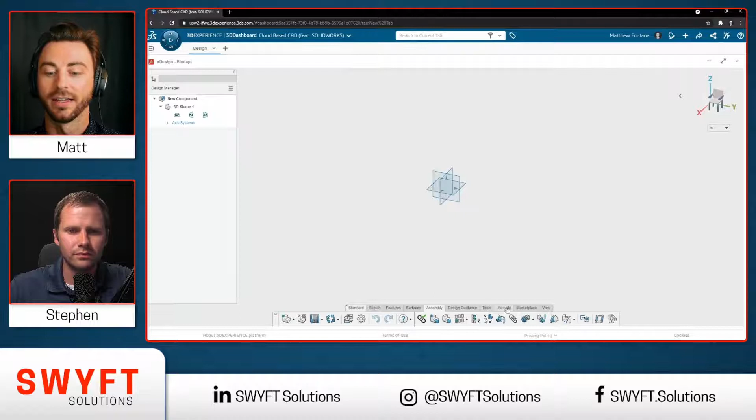So you're able to insert other components. You have all of your standard mates for mating these components together. You even have some evaluation tools like clearance check, and built into all of these is the data management side of things too. So you have your revision tools, your reservation. You're able to collaborate really well with your team.

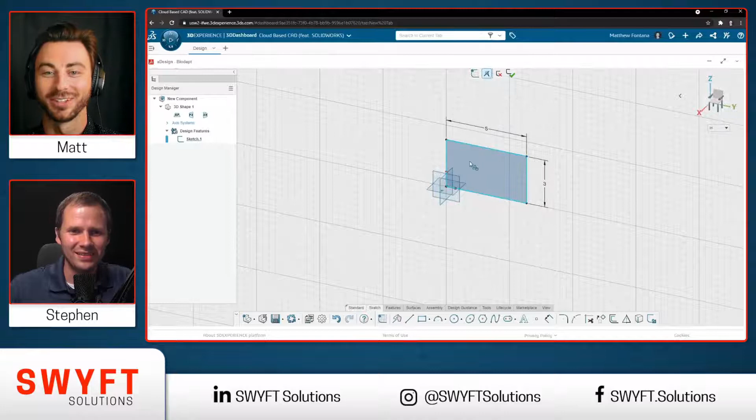Jumping into a workflow, you're able to sketch on a plane just like you would if you were in SolidWorks, and then you're able to, like you always should, fully define your sketch. So make sure you fully define your sketch as you're moving along in your modeling process. No blue lines. Absolutely not, I will not accept it. Then you go ahead and choose your extrudes, your cuts, whatever you want to have as a feature. Just like SolidWorks, you now have that feature in your interface.

Now with the xApps, there is something specific to xDesign. There is something called super features, where you're able to change a feature after the fact.

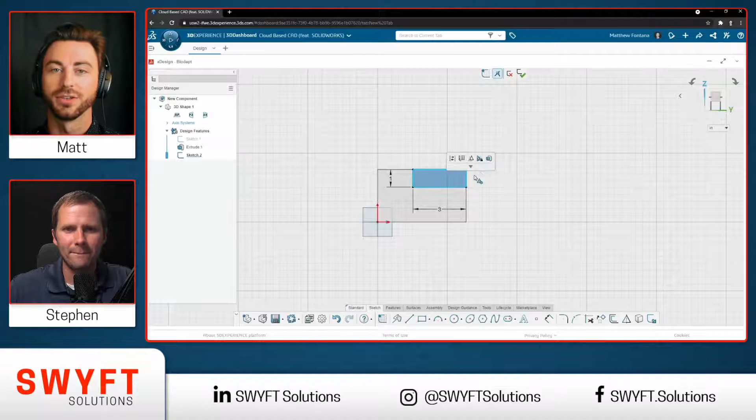If you've ever had a situation where you draw a sketch and say make it an extrude, and accidentally create an extrude when you meant to cut into that, you'd have to delete that feature. In SolidWorks you'd delete the feature and the sketch is still there, but why not just switch it to a cut? Here you're able to have a super feature, and instead of redoing that whole feature, you just revert it back into whatever you meant originally.

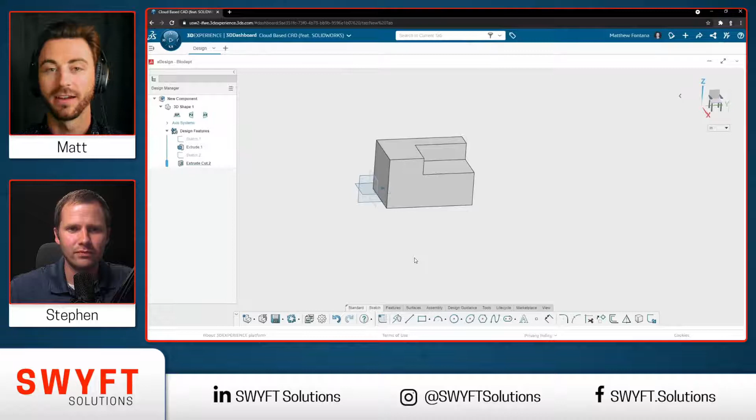So that's just a really quick glimpse at xDesign. For a lot of people with basic 3D modeling capabilities, you're going to be able to carry right over from SolidWorks and jump right into xDesign on whatever device you're on, and just start modeling away and making all your parts and assemblies.

Now, I didn't want to stop you, but you jumped in right away and mentioned saving your data and cloud data management. So just to be clear, I can not only use this app anywhere, but I also have access to my data anywhere.

Absolutely. Your data is cloud stored, secure, and it's not just stored on the cloud - you have your PLM built into that as well. So your revision control, your lifecycle management, you can even do branching off to do some concepting. All of that's built into the power of the 3D Creator role, which houses the xDesign app.

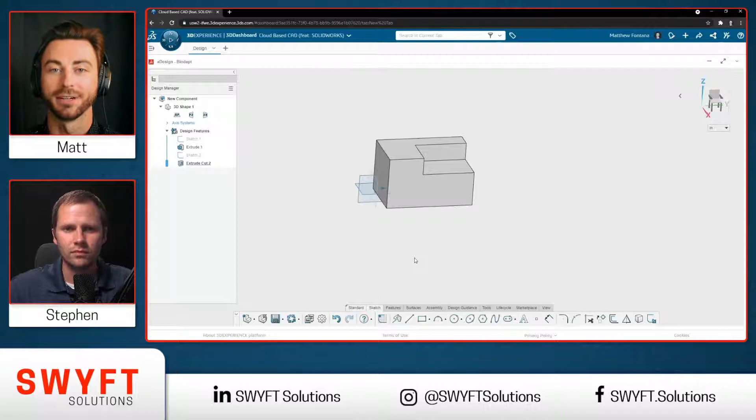Awesome. So let's take a look at xShape. For people involved in SolidWorks, xDesign was probably quite familiar, but xShape will be a whole new concept to SolidWorks users. It's using a subdivision modeling approach, wherein traditionally, to create those aesthetically pleasing industrial design types, you'd have to get really good at surfacing, with a lot of curves and sketches all over the place to make the surfaces just right.

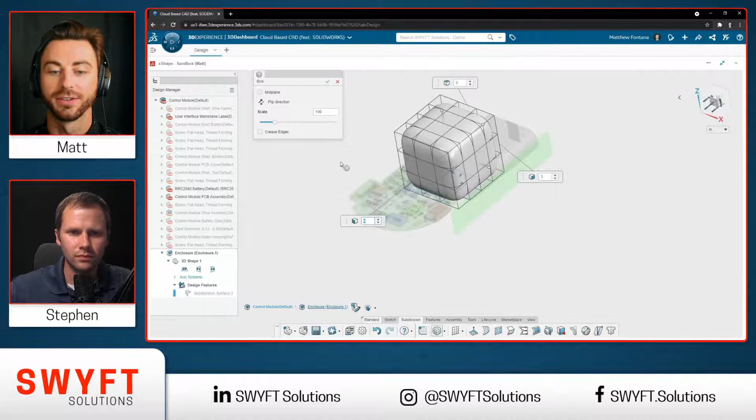So with xShape, say you have an enclosure that you want to build. You can have the geometry there that you're going to build it around, add a virtual hunk of clay, and then choose how refined you want that mesh to be in the 3 dimensions - you can choose if you want it more refined in one direction versus the other. Once you have it all set, you can position it as needed and place it into the geometry itself.

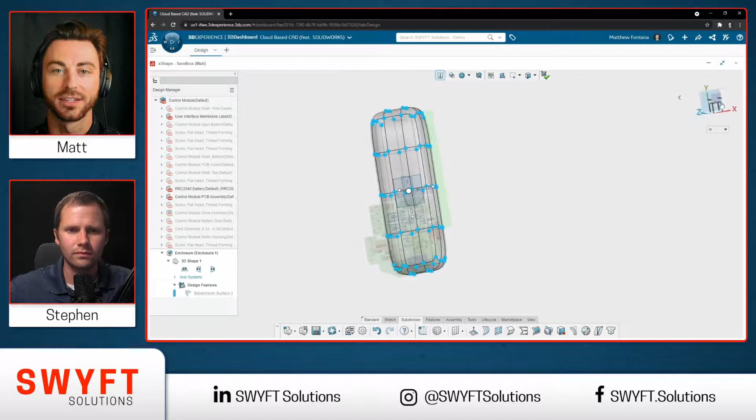Once you have it in there, you'll see it's a number of nodes and loops and everything, and you can change the opaqueness to see through right to your geometry and start pushing and pulling right around that geometry. With parametric surfacing, you would have had to have all the sketch lines, and updating it would be even worse. With this, you're able to just start pushing and pulling as needed.

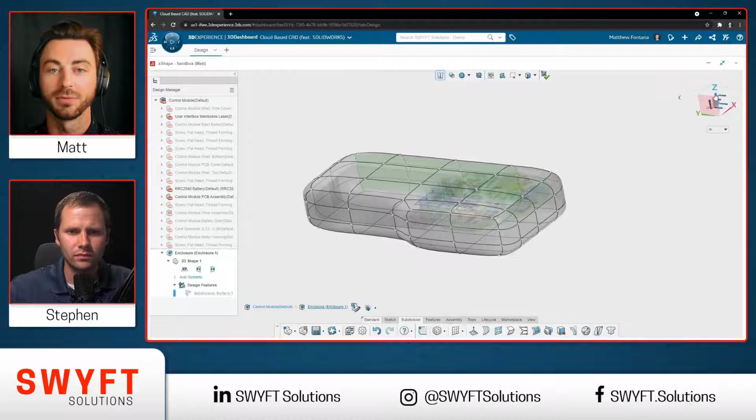Not only can you push and pull the original geometry you had in there, you can start selecting certain faces and edges, and actually add or remove material from that. So here, let's go ahead and extrude that out a little bit, add some more material where we need it, and then you can go back and start pushing and pulling that new material as well. That gives you a lot of flexibility to create this type of geometry really quickly.

I like what you did there, flexibility. Yep, always flexing. There's actually a tool - that's the flex tool right in here.

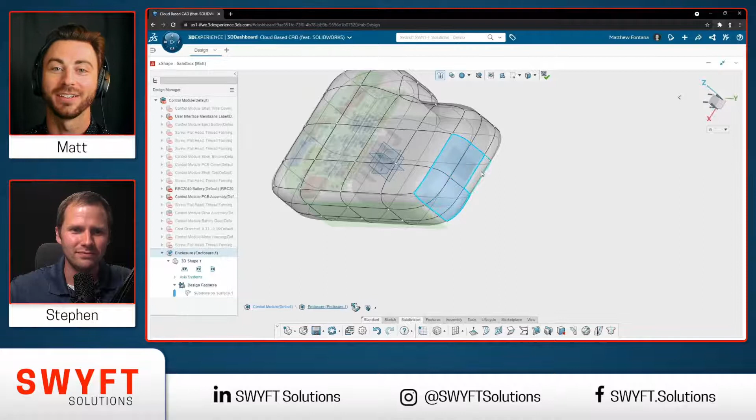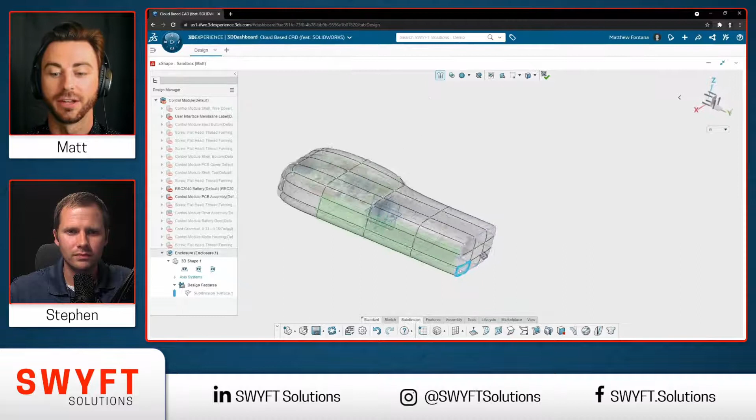This is all C2 surface continuity, so right off the bat you're going to have really nice smooth surfaces, but you don't always want that, so you can go ahead and crease that edge if you want. You can choose how defined you want that crease, making it a sharp edge or a slightly sharp edge, and once you have it how you want, you'll have indication by the color of the line that it's a crease edge, and it's not C2 surface continuity anymore in that area.

In addition to just creasing the edge as a hard sharp edge, you can actually choose to have a softer filleted edge there, where it's still got like a sharper edge, but it's filleted still.

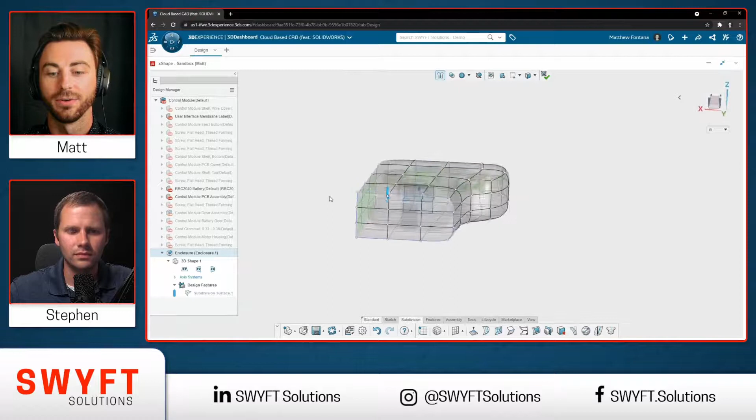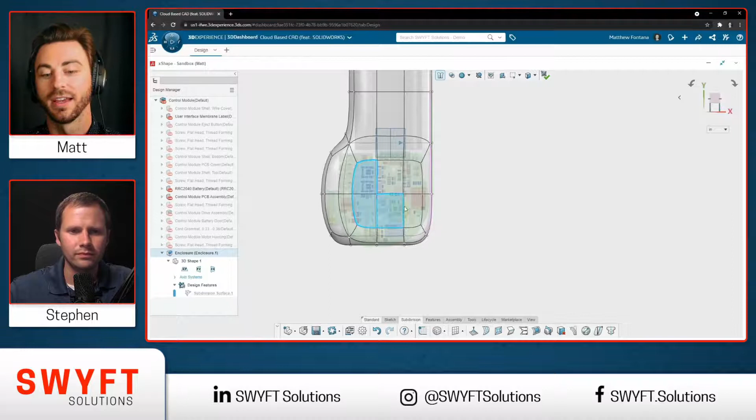Once you have that, you may realize there are some areas that aren't as defined as you want. You can add material, we've seen that. And what if you want more definition in a certain area? That's where subdivision comes in, so you can further subdivide to get more definition into specific areas. Now you have more faces to work with and more precision, and you can add additional loops as you go.

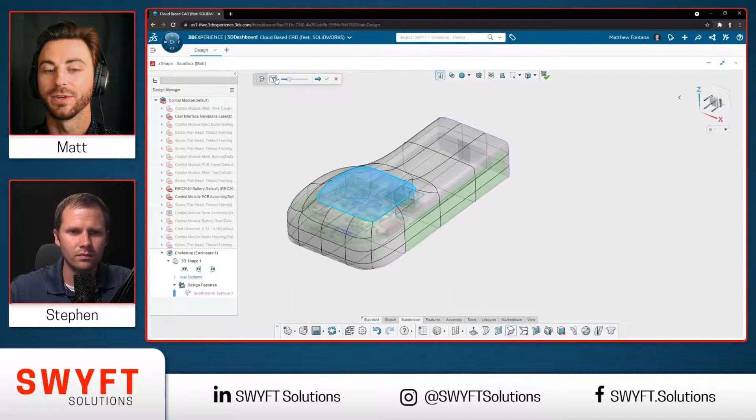Here you can see there's now a nice smooth surface that with traditional surface modeling could have taken a lot of time. And even if it was relatively quick, how long does it take if somebody wants a change? You have to go find which sketch you made that feature with, tweak that sketch, and hope everything doesn't blow up, or if you change something upstream, hope it doesn't mess something up downstream.

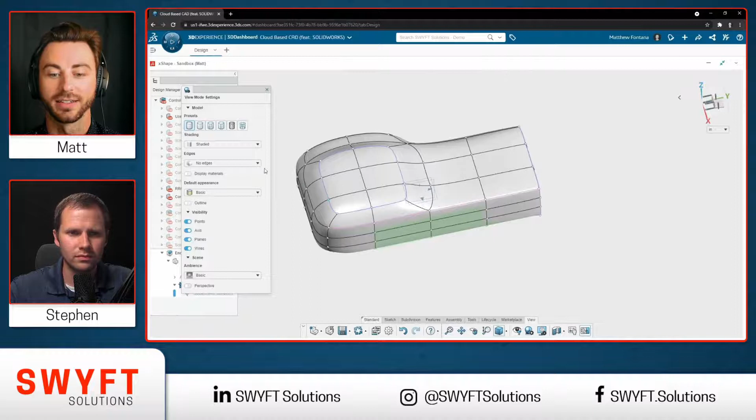Here we can see it's nice and opaque, you can see what it looks like without these lines, and we have a nice smooth surface. That's awesome, Matt. So you're doing an enclosure here, but it looks like this is still a solid part. Yep.

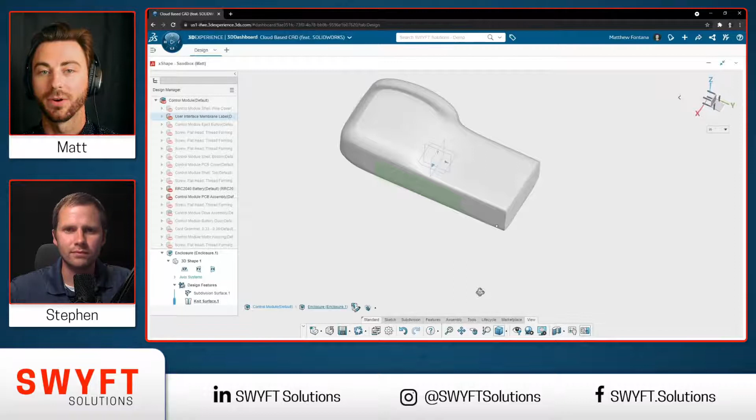That's the thing with subdivision modeling — that's just your overall shape there, and you can dive into some shelling features right within xShape. But if you pair it with the power of xDesign, you can dive even further into the parametric features of adding to these bodies. So let's take a look at that right now.

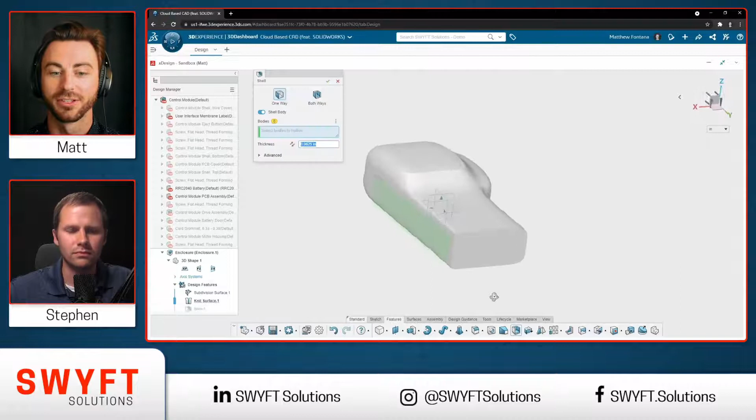Jumping into that same enclosure, I can choose right from xDesign, right within that window — just one hotkey and I switch environments. It doesn't look like much changed, but if you look at the toolbar at the bottom, now I have those parametric features available again, and I can toss geometries back and forth. So I'm able to shell that geometry and choose the thickness of the material I'd like to shell it to.

You can go even further beyond that — you can add any cuts or holes. So let's go ahead and add a cut, and you would follow the exact same procedure as if this was a solid body modeled in any other way. You can add your sketch, and what happens when you add a sketch?

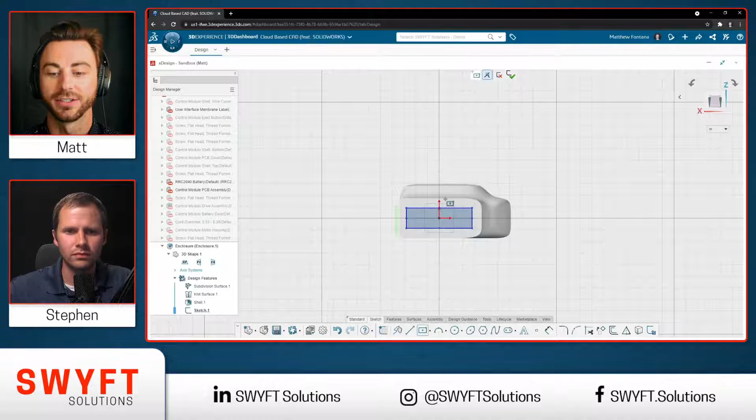You define it, Matt. Yep, you've got to have it fully defined — no blue lines, or I will kick you out of the class. Once that's all defined, we can choose the feature we want to do.

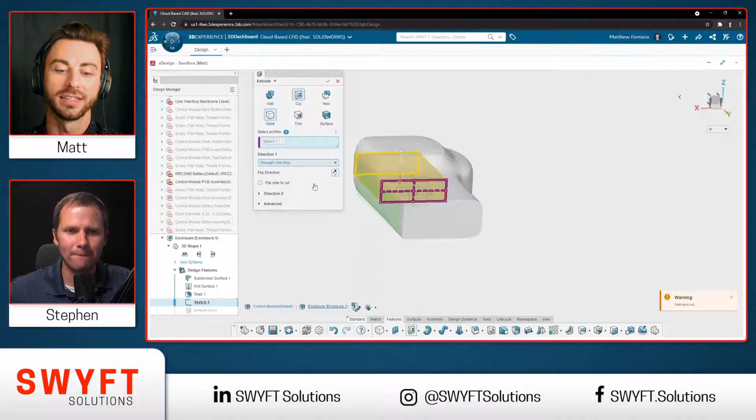Let's go ahead and cut right through the end of this for any receivers that have to go into this enclosure, and you'll have the same dialog windows as if the part was modeled right within xDesign itself. Ooh, nice job, you did a cut that time. Yep, I knew what I was doing. But if I didn't, it would be easy to switch it right to a cut from those super features.

So what happens if you want to use this within SOLIDWORKS? Especially with 3DEXPERIENCE SOLIDWORKS, we'll mention that a bit further. The 3DEXPERIENCE SOLIDWORKS is an offer that combines the power of SOLIDWORKS, and it actually has xShape and xDesign included in those offers. So you're able to potentially pair the power of these, but what does that look like?

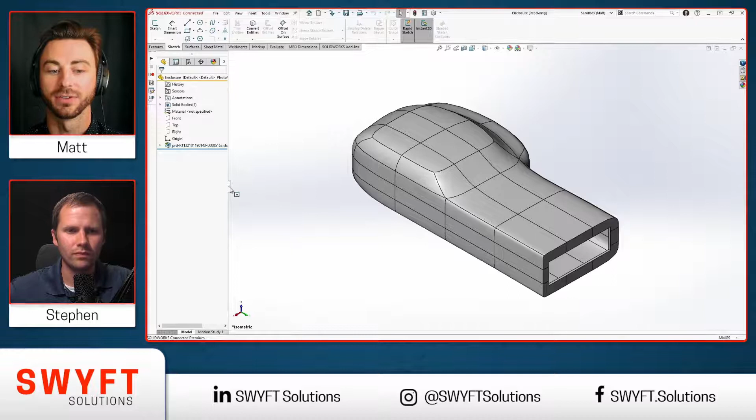When you open up something from xDesign or xShape into SOLIDWORKS, this is what it'll look like. You're able to open up that geometry, but the feature tree itself is still linked back to the original parent of CAD modeling. So it's just a linked body within SOLIDWORKS, but as long as you don't break that link, you can go back into whatever app this was designed in.

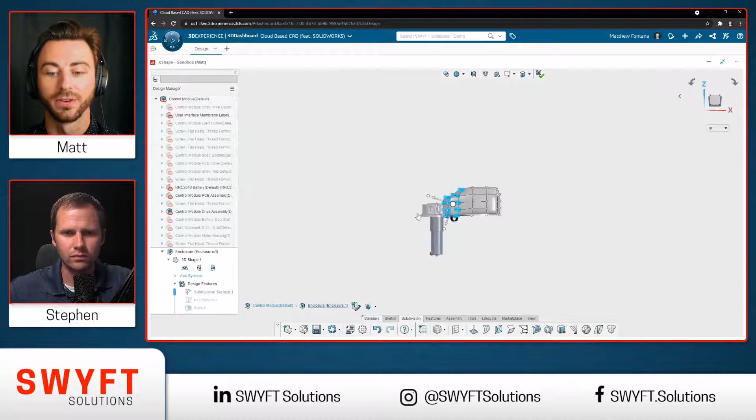In our case, either xDesign or xShape, and you can make the relative changes there. We'll jump back into xShape, and we see the geometry's changed in SOLIDWORKS — they added some more components, so we need to stretch this out further to encompass those components. You can jump right back into xShape, choose the orientation of your triad for a nice clean sweep, and sweep it over to make sure those components are enclosed. Stretch it out on the other side — I missed a component the first time — and smooth out the bottom a little bit.

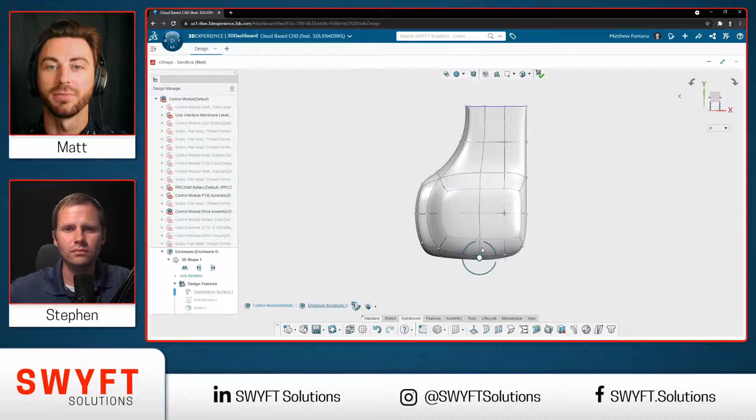So once this goes into SOLIDWORKS, you can make cuts in SOLIDWORKS and export it off, but it wouldn't be the workflow that you'd be saving it back up to the platform. So if you're making true cuts and geometry that you want to stay in the cloud-based storage, you're going to make it relative to its parent app. So if the component was designed in SOLIDWORKS, you'd make the changes in SOLIDWORKS. If the component was made in the xApps, you'd come back to the xApps and make the changes.

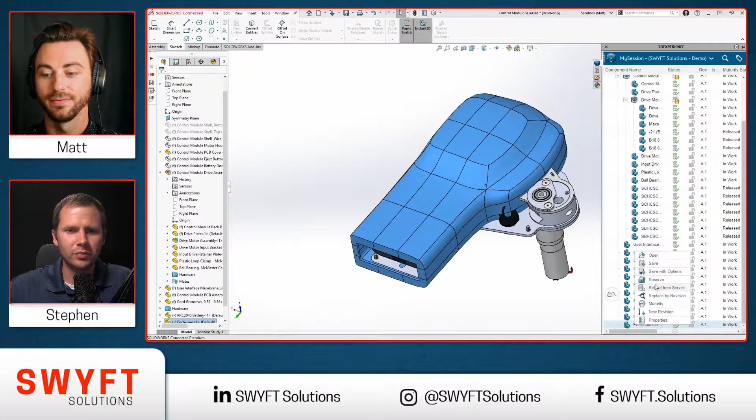And what I'm noticing is it's just a simple open. It's not like an export and then re-import into the xApps. It's just open from your dialog. And right there, that's all it takes to update it within the SOLIDWORKS window. You just right click and reload from server.

And since that data is all tied to the same storage method, just like you mentioned, you don't have to re-export it and re-pull it in. You just reload it from the server, and now all of a sudden in SOLIDWORKS it has that updated geometry. So even though you might not be making the changes right within SOLIDWORKS, the workflow is really clean.

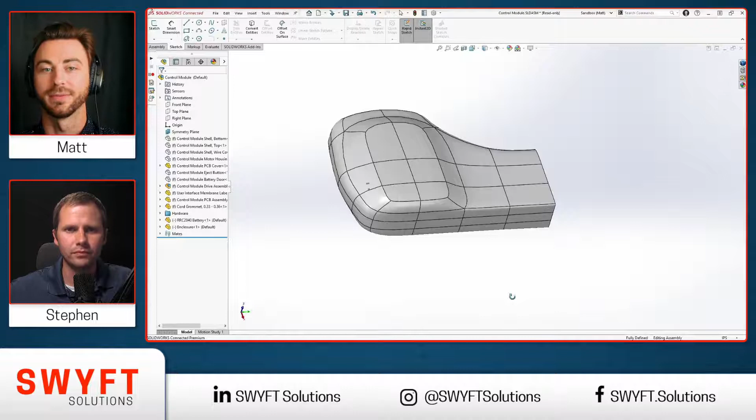Yeah, and one thing that I find interesting too, even as you're switching between SOLIDWORKS and the xApps, is it doesn't matter. You don't have to be the only one that's designing the parts. Maybe you have a specialist that's working in xShape, or a specialist working in a different xApp, and you're running SOLIDWORKS, and you can just reload from server and you're loading in their enclosure data.

Yeah, and that's part of the tools that are built into that PLM, because there's a whole reservation system built in. So if you're working with a team and you don't want somebody to make any changes to a model while you're working on it, you can reserve that data, and that's now read-only to them. They can't make any changes. Only you can save changes up to the data storage.

Got it. Now, Matt, you went through that super fast. So we went through 3D Creator and 3D Sculptor just from a really high level, giving you guys just a taste of what those two roles or xApps can do for your company and your business, how you might be able to use it in your workflow. So let's go even faster through the remaining ones here, Matt.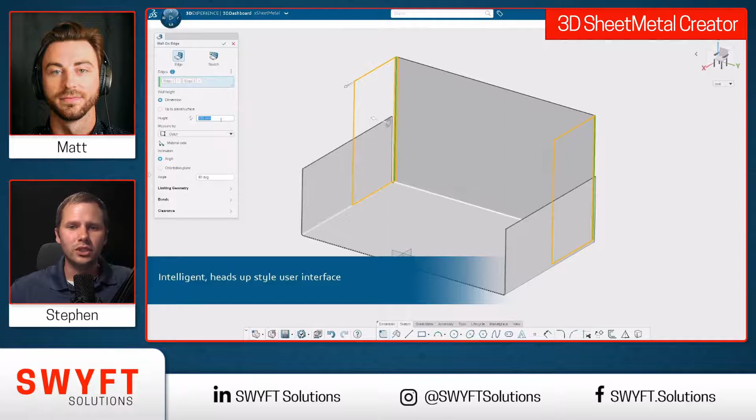There's a lot of capabilities from the xApps, and it's kind of interesting because you think about the xApps, but they're actually defined as different roles, which are listed here. And that's very convenient, right? Because I like to think about the different roles as different specialists within an organization or on a project. So we talked a little bit about 3D Creator and 3D Sculptor, but let's jump right into the next role, which would be the 3D Sheet Metal Creator, and the app would be xSheetMetal.

And really, this one hits home to my background, because I spent a lot of time in the sheet metal world, and honestly a lot of time in the little sheet metal tab on my ribbon in SOLIDWORKS. And if it wasn't a feature that I could either cut with a laser, with a turret, or form on a brake press, I didn't need it, so it would get removed from my SOLIDWORKS. So there are a lot of SOLIDWORKS Professional features that I potentially didn't use, especially on a daily basis. Yeah. So this one really hits home.

So this is 3D Sheet Metal Creator, and it really gets your specialist, whether you're a sheet metal designer, all the tools that you need to design in sheet metal, and you're doing all of that from the cloud, right? So as Matt mentioned, these are thin client solutions where, if you're a sheet metal shop, you won't need to purchase those heavy duty laptops or desktop computers to be able to run SOLIDWORKS, where you can run these right in your browser.

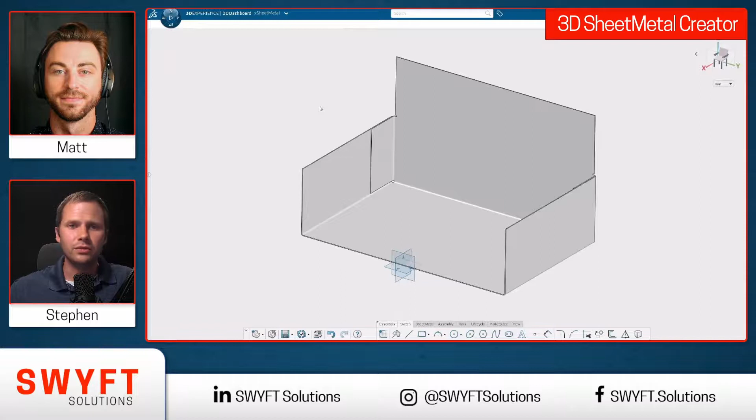And export capabilities are there. So if you're a sheet metal designer, you want to go through, get that flat pattern so that you can send it out to the laser cutter, or like I said, brake press, and that's what you can do here with Sheet Metal Creator.

Next on the list, we had 3D Mold Creator, which, Matt, I wonder, what do you think the 3D Mold Creator specialist is? What do you think they're doing? I don't know, maybe mold removal, going through, checking the structures.

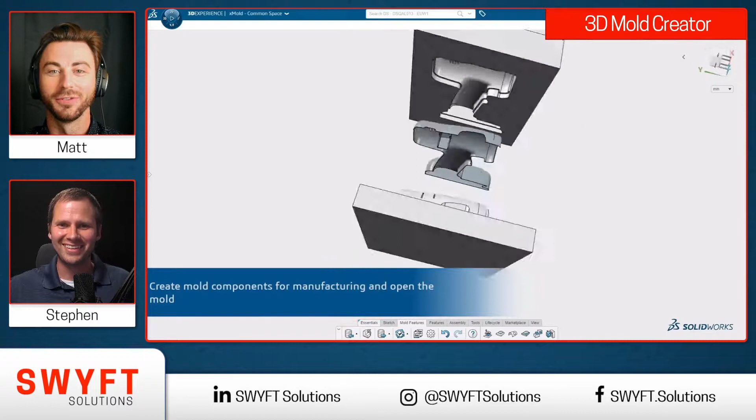So Mold Creator, it's exactly what it sounds like, right? You're going through, you're designing functionality for molds, whether it's the mold core, cavity, insert geometry, you're compensating for shrink, you're checking for drafts and undercuts. You're a specialist in mold design, and this is where you're going to live.

This is your role. We're talking through a lot of different roles and specialties, but in reality, you can assign specific individuals at your organizations, maybe specific roles. Maybe they're a specialist in 2 different areas. Awesome. 2 different roles, right? So it gives a lot of flexibility.

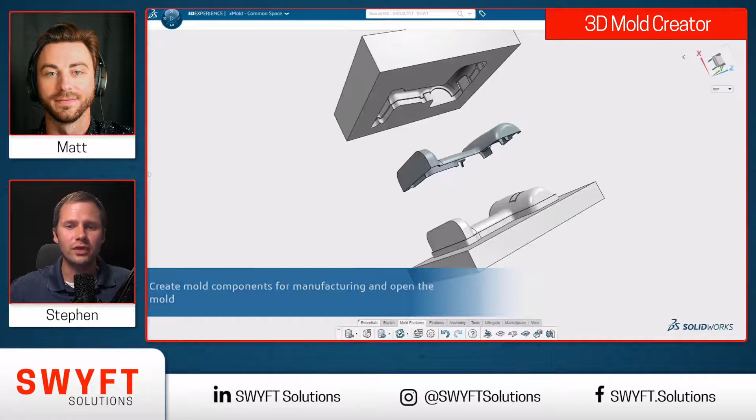The next one here, 3D Structure Creator, is another role. Exact same scenario where you're a specialist in framing and sheet metal or structures, where you can go through and choose a profile from a library of standard different types and sizes. From there, export your cut list, right? That's what you want to do. You want to get this out to the saws and start cutting lengths and welding together. And this gets you there quickly.

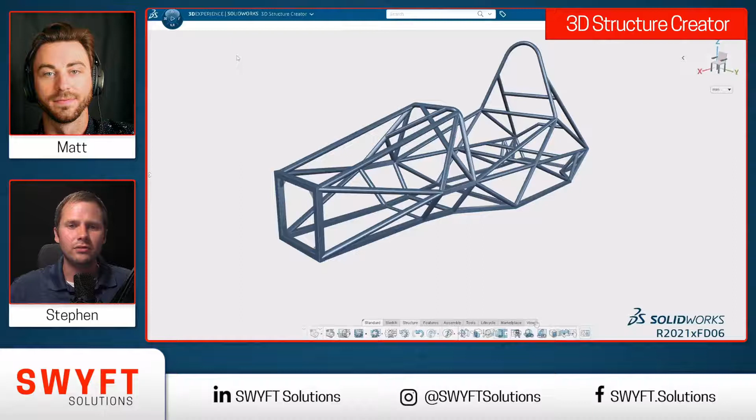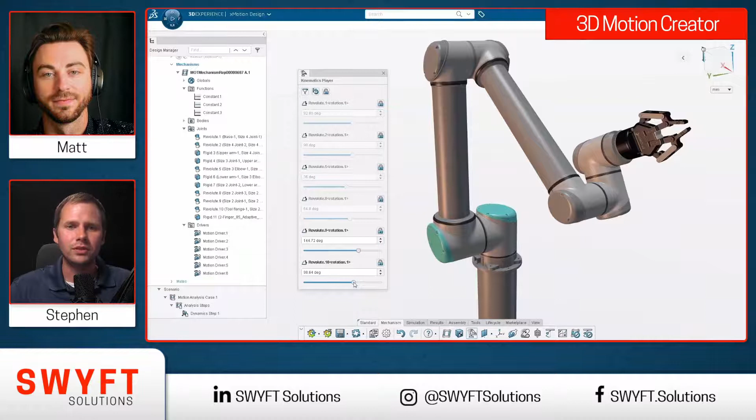Next, we had the 3D Motion Creator on our list. I mean, this is an awesome video, awesome example, kind of a crowd pleaser. I know we have some projects coming through internally where we're leveraging this tool. We're checking robot reach, different animations for customer sign-offs. This is the tool that you'd be using to validate your motion.

Next, this one's fairly impressive, and it doesn't really do it justice here, but I'd encourage you to jump on and dig deeper into 3D Pattern Shape Creator, xGenerative Design. Really, you're allowing your designers to design any shape or pattern using CATIA parametric modeling technology. And there's automation built into this too, which is just incredibly impressive. And we don't have the time to dig deep. Maybe this is an entire other webinar on its own.

I know we're just doing a high-level overview, but being able to quickly generate simple to complex, non-regular shapes and patterns is amazing. And again, these are extensions of SolidWorks, right? So you might still be working in SolidWorks, but you have a specialty. Some of these apps do things you're just not capable of doing inside of SolidWorks.

Absolutely. And just to mention on this one while we're here, and really for all of these, they all work together. I mentioned SolidWorks, and there's a little bit of refreshing there, but in terms of the xApps, they're working together right on the platform itself. So you're able to just jump between these.

For example, you're able to design geometry, say in xShape or xDesign, and you're able to use this algorithmic design here and maybe create a really cool surface texture for the geometry itself. Or as you can see here, you can create entire geometry in the 3D Pattern Shape Creator. It's an approach on how you want to use the solution for your organization.

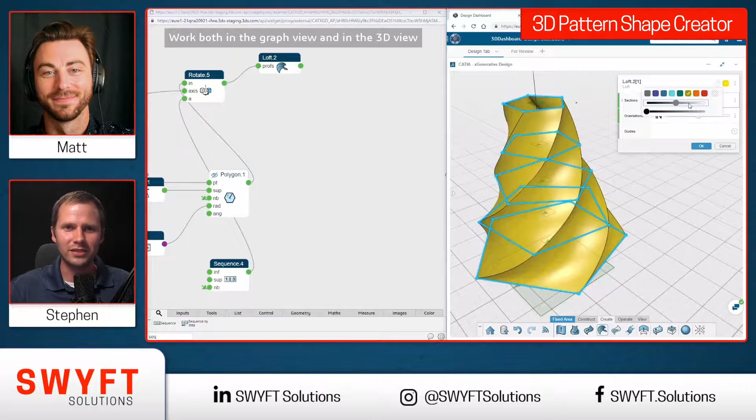Yeah, so now I have my product. I've developed the product through different apps or SolidWorks. Now what do you think I should jump into, Matt? We're all ready to go. We've done our mold design. We've created our different sheet metal components. What do you think's next? Probably has something to do with marketing, I guess. I'm thinking we're probably going to have to sell that product so that we can make sales and grow our team and make even cooler products and bigger impacts.

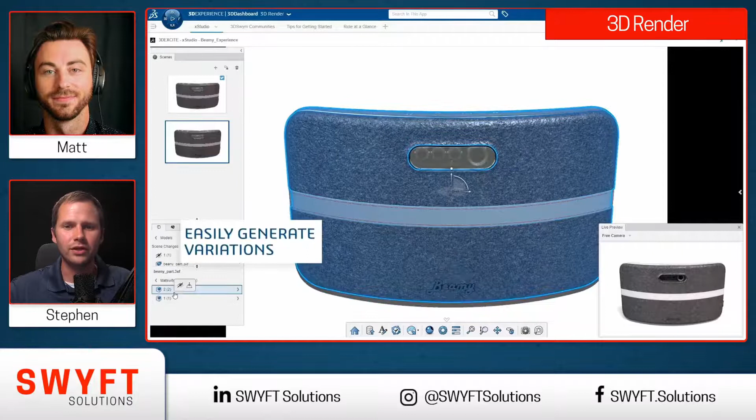And that's where 3D Render comes in, which the app itself is called xStudio, where you can easily create and share photorealistic renderings to promote your design. Again, think marketing, think sales. This is the ability to have your connected data right into your marketing team, or if you're the engineer and maybe you're creating a pitch or a customer design review and you want to do some renderings, this is the perfect tool to be doing that in, and it's all cloud-based.

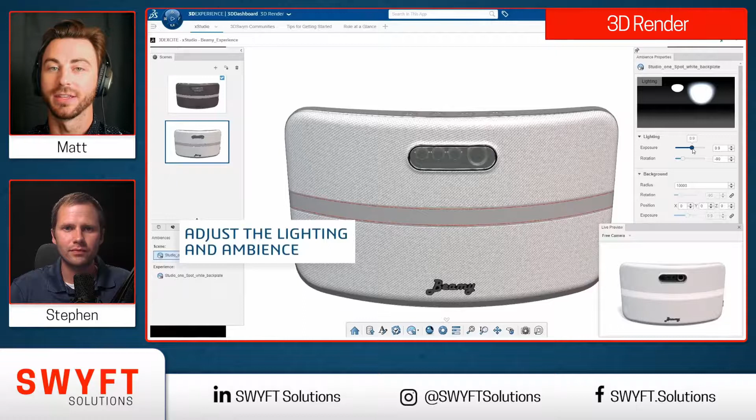Yeah, and just like you saw with the SolidWorks being refreshed and everything, that's a really handy thing with this: you can set up all of your environments and everything with your renderings. Your team makes some updates to the model itself, and that's all tied back to the original data. So you're not going to have to start fresh and create all of those environments and backdrops and everything again. You're able to just update the geometry in these renderings and rerun the renderings.

And another thing on top of that is these renderings are running on the cloud. Rendering is typically a very hardware heavy process. You have to have all of the graphics power to do those renderings quickly and efficiently. Whereas with these cloud computing capabilities, you can really get these renderings up and running, especially for people that might not have the hardware already and can't justify the cost. They can just have the cloud computing carry out the renderings for you.

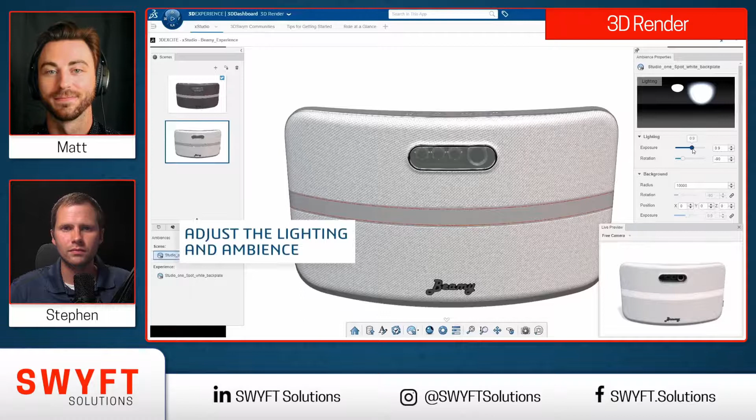Definitely, and this is something that even happened today, Matt. I keep going back to the data and how these apps all work together with SolidWorks, and it's kind of a seamless transition. You're pointing all to the same location of all your data. I was at lunch today and I had an idea on a project that we're working through internally. I pulled up xDesign on my phone and I checked some clearances to see if that bracket I was thinking about would fit in that location. I just did that right on my phone. I didn't design up or come up with any concepts. It was more or less me validating if my idea would fit.

Honestly, if I wouldn't have done it at that moment... my personality is I come up with all these different ideas, and if I'm not logging it quick in a community or writing it down somewhere, I've got a board in my office that's just ideas, right? If I think about it, I write it down, because if I don't, I'm going to forget about it, and then that good idea is gone. This gives me access to all the data, I can check it quick. Maybe I'm not going to do it right then, but I'm going to maybe take a screenshot, write a note in a community and be like, hey, come back to this. This is an idea. What do you guys think? Yeah. And then someone can jump in and dig into more detail from there. But again, it's getting that idea into place. And that's what I like about these xApps.

So again, we really quickly summarized 3D Creator, which is the role, and then that app is xDesign, where you can do some of your parametric design. 3D Sculptor, the app is going to be xShape, and that's where you do subdivisional modeling. 3D Sheet Metal Creator, which is xSheet. I was thinking about this too.